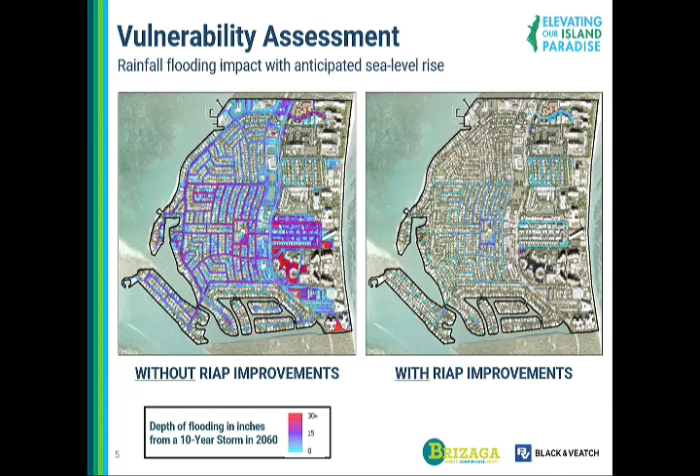These projections are so much greater in 2060 than right now because of projected sea level rise, for which we've used NOAA intermediate high. Here's a little chart on the NOAA projections.

Just to add, those projections come from the Southeast Florida Regional Climate Change Compact, and a decision was made to go with NOAA intermediate high because the compact recommended that for the infrastructure being worked on, given its life cycle, that would be the most appropriate projection to work from.

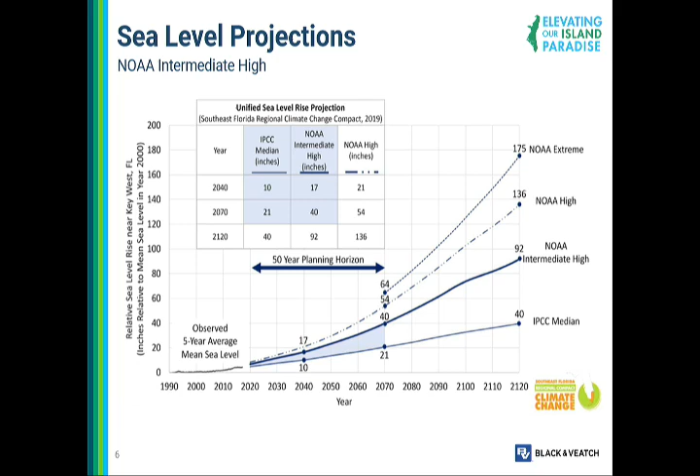We're doing that with the lines of effort, which were presented in the strategy sessions. Those remain the same: shoreline protection, working on the beaches and the bayside; stormwater system upgrades, which we've been working on diligently for the last year — now we're actually at 30% for the first zone; and roadway improvements, so while we're opening up the roads and installing the new stormwater, we'll also be doing some minor adjustments to help alleviate flooding and give better clearance.

Utility hardening: the plan is to underground the utilities in Zone 1, making it more resilient to wind with fewer power outages. And then regulatory modernization, which includes all the ordinances to ensure better future building in the village.

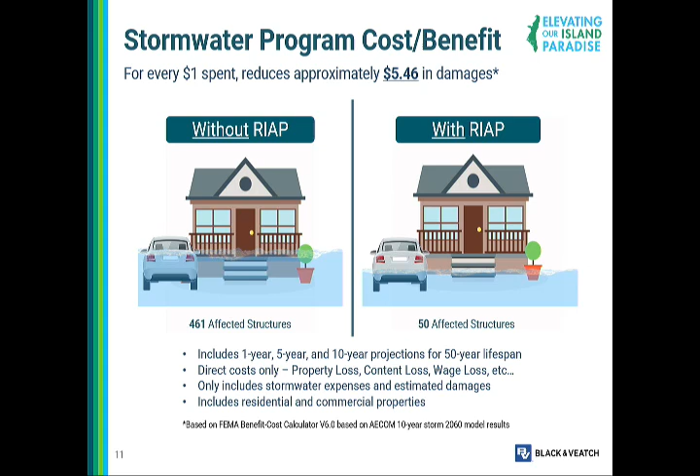But Roland, why don't you talk about where we've been and where we're going for the future? Yeah, it's been a pretty long and winding road, no pun intended. I'll mainly focus on 2015 till now because a lot of really critical work has been undertaken in this, I'd say, 10-year period—2015 to 2025—that lays the foundation enabling us to do this ambitious effort of dealing with the flooding in the K8 Zone 1 area.

Since that time, AECOM was brought on board in 2019. In 2020, we passed a bond in order to start looking towards how we were going to address those big capital-intensive improvements. Then in 2021, 2022, 2023, AECOM has been working its way steadily towards the point that we're at now, which is that we're in full-blown design of that first zone around the school.

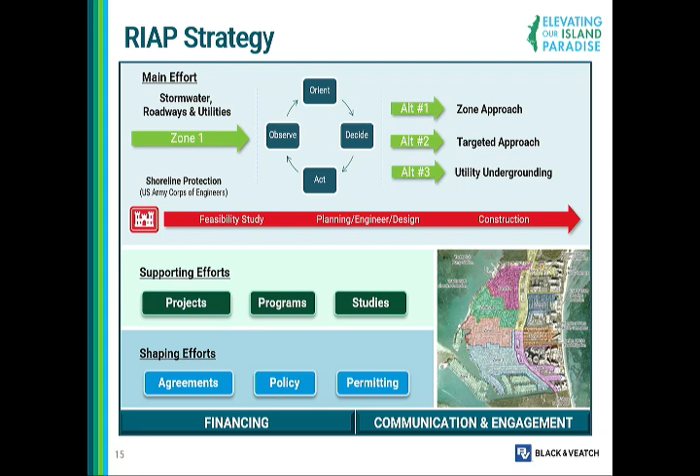And also, because we've been able to close the discharge deficit gap in Zone 1 the way we chose to, that gives us the flexibility to pivot later down the road if we choose to Zone 3 or 2A. We're also working with the yacht club on discharge capacity there, which gives us additional flexibility for what we end up doing beyond 2A and 2B. So that's kind of the way it works.

Let's move on to this. So what I want to do is give you the big framework, then pass it over to Mike to deep dive into the main effort, which will quickly get us to Zone 1. Why don't you go ahead, Mike? I think we need a little Corps explanation first.

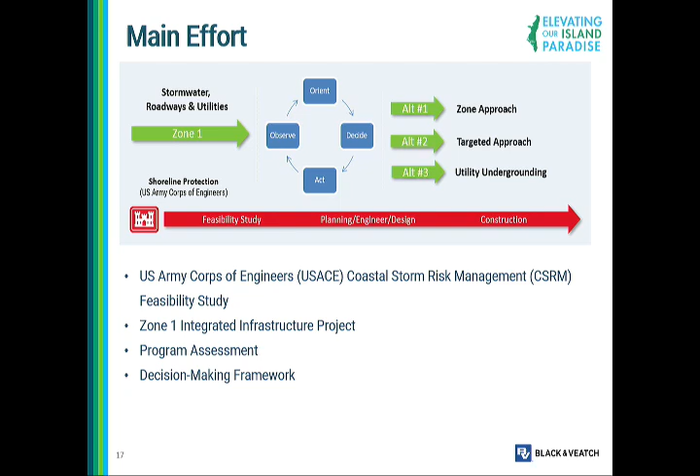Before that, just to quickly give you an overview of what's happening with the Corps: we initially had them working on the ocean side. Then it was determined that we needed a whole-of-island solution, and they agreed to do an analysis of the back bay, the bay side. Together, that's basically a whole-of-island shoreline protection solution that we're driving towards.

The back bay feasibility study is underway. We kicked it off about 6 months ago. They're working towards a future-without-project analysis as step 1. While doing that, they're also refining their scope, schedule, and budget for the work beyond that, the future-with-project, which ultimately leads to shoreline protection solutions considered for implementation to protect the island. That's on track, but everything with the Corps is a long-term proposition.

So we're on the road, but it'll be a 3-4 year process. That's just something constantly happening in the background as we focus entirely on Zone 1. Thanks, Mike, as we jump into this, I'd like you to walk us through it, but I want to make sure council members have an opportunity to ask questions and give feedback. So why don't you lead us through that discussion?

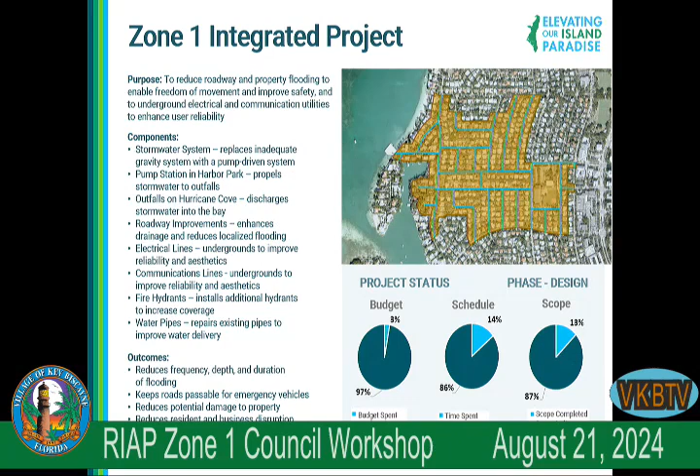We've had a couple folks in the crowd who realize this is what we need to tackle. So we're not tackling the entire village. We're going after Zone 1 right now, as we continue to, as Roland said, aggressively do our maintenance across the... Hold on a minute.

Ed, are you on? Yeah, I am, just listening. I have a question for Roland.

Roland, I don't understand, maybe you can explain to me what the water table has to do with the gravity fed underground stream at a gravity well. I couldn't hear, can you repeat? You wanted to know what the deal is with the water table and what that has to do with drainage, with gravity, with the gravity well. Yeah.

So the depth of the groundwater table defines how much hydraulic gradient you have. Hydraulic gradient is basically the difference from high to low. Water doesn't flow uphill, and it doesn't like to flow when it's flat. So if the water table is really low and the water on the road is higher than the water table, it will flow like a ball rolling downhill. If the water table is at the level of the road, there's no slope, so the water can't really flow.

So it has to pond up higher to have a bit of a slope, a bit of a pressure head. That's your hydraulic gradient, and that's what ultimately makes the water flow out the bottom of the well. So basically, the well is cased. So the water table shouldn't affect the hydraulic gradient, because the water is like a tube. If the tube goes down to the underground stream, for lack of a better term, it shouldn't be affected one way or the other by the water table.

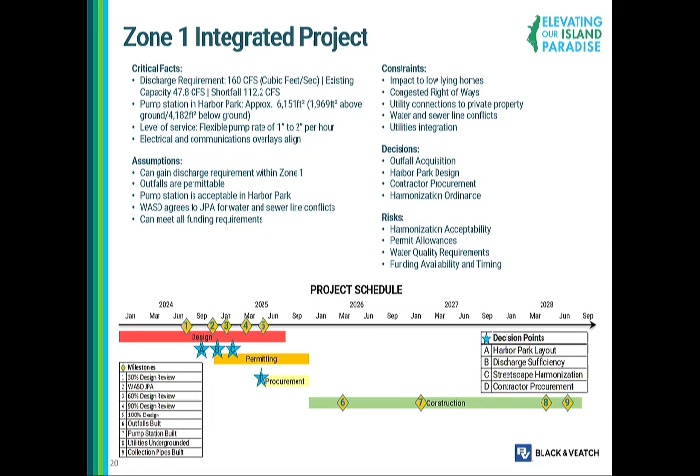That's when we probably break ground, right? Yeah, after we break ground, sometime around the end of calendar year 2025, beginning of 2026, we anticipate going into probably 2028 for the complete construction of Zone 1. Beyond that, we have no timeline.

Okay, perfect, two more questions. What areas are most needed, or where did you guys see a weakness in the drainage? Without a doubt, Zone 1, that's why we started there. Zone 1 was essentially selected before I even started, mainly because — and I don't want to put words into other people's mouths — it was the school, it was a safety issue. A lot of people in the community have kids that end up attending that school, so there was a lot of attention there, and the inundation there was particularly bad.

Beyond that, there are other areas to the north of Zone 1 and a bit to the south of Zone 1. There's Holiday Colony, that's also pretty bad. There's Ocean Lane Drive, that's also pretty bad. There's Garden District, that's also pretty bad. Mashta Islands, not so much. Northern part of Zone 2 around Harbor Drive and the churches and stuff like that is not so bad. So we're not really focused beyond those areas, but the program we've structured and framed up enables us to understand all these elements.

What's your last question? Last question, real quick — as far as the numbers. Yes.

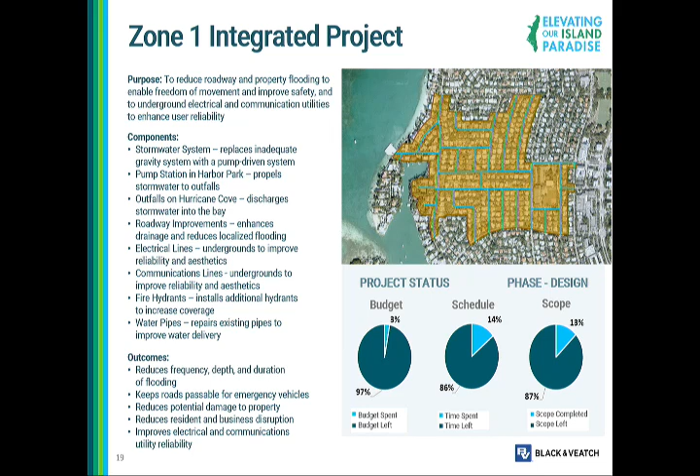So Mike, let's walk us through. We already talked about that. We talked about the details. We talked about the outfalls. Why don't you just give a quick update, because I know you want to talk to council about your ability to go deeply into this project.

Absolutely. So one of the things we did is we built a baseline schedule for Zone 1. We included everything from funding to permitting to procurement, construction, and engineering. Everything is linked to each other. We talked about this at length, but that is one of the tools we now have at our disposal that we built in the past few months so that we can make better decisions. We can determine whether or not we're behind schedule, ahead of schedule, whether there's a deadline we need to meet, which will help us mitigate any missed items and will help mitigate costs as well.

Absolutely. So we did some research on Zone 1 property values using the tax data we had and actual just value. We came up with about $1.57 billion. We're going to get into the budget in a bit, but basically we're looking at about a 4.5% investment into this zone.